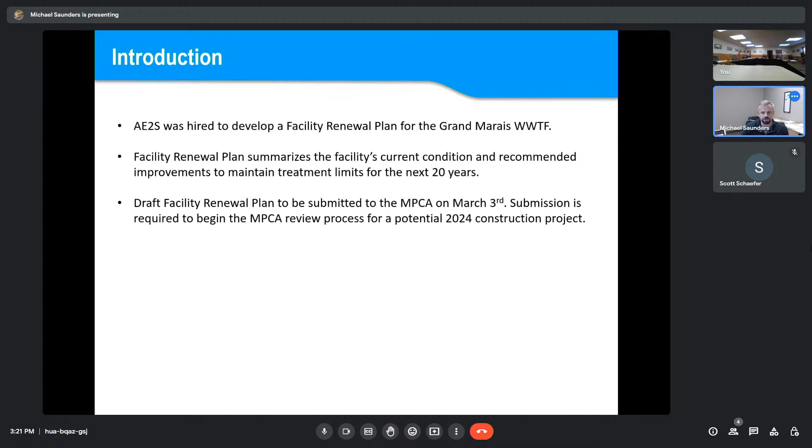So facility description - I figured I should just talk about what you guys currently have now, just a brief history. The facility was originally constructed in 1972. There was a major upgrade completed in 1988. And then disinfection, to remove pathogens, that system was included in the 1999 project.

So raw wastewater comes in, there's a bar screen and a comminutor in parallel. The comminutor grinds up inert solids that wouldn't be able to make it through the plant without being ground up. This is pretty old technology, but I'll get into that later.

It goes into vortex grit removal, removing sand and heavy particles. You really want to settle that out to protect the downstream processes - we don't want that grit going through the pumps or settling out in the oxidation ditch or even the clarifiers. After that, it gets into the more interesting process.

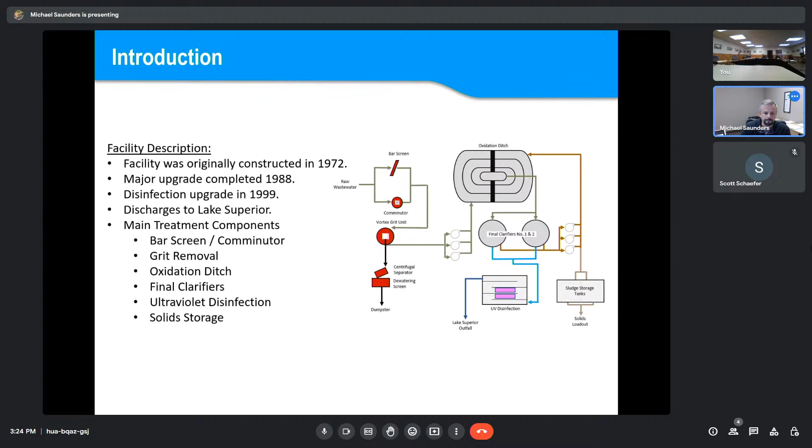Just a couple of comments here. 20-year planning horizon, we included a population growth of 1%. We looked back at past historical census data, and it's pretty stagnant population growth. But for the purposes of planning, best case scenario, we want to consider 1%. So continue adding 1% population, there's going to be more load, more flow with that.

To do that, we utilized the last 5 years of DMR data that the MPCA provided. So this is the current capacity, hydraulic capacity of 2.5 MGD, and then the organic loading is 884 pounds of BOD per day. So that's the current capacity.

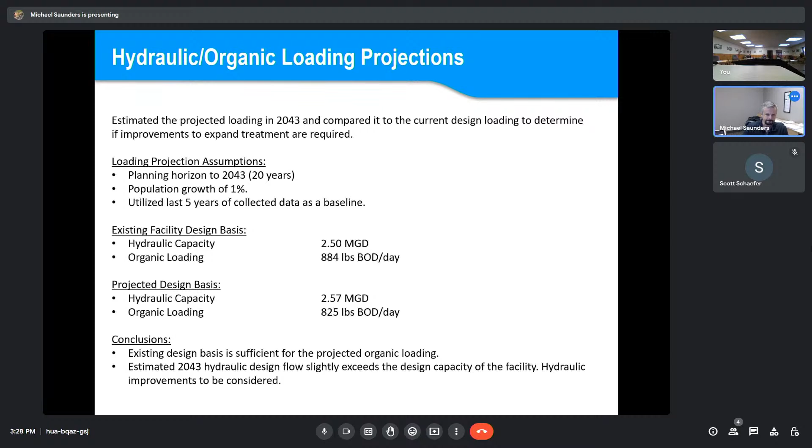So getting into the condition of the facility, I have a few pictures on the next slide here, but just wanted to, there's more detail in the report, just to touch on the highlights. So preliminary treatment condition, that first, the preliminary treatment equipment is located in the service building.

So that comminutor I was just talking about is a fairly antiquated technology. There's much more efficient automated technologies that will save O&M costs through the next 20 years at least. And yeah, inefficient, antiquated, labor intensive I would say, and Neil can probably attest to that there. There's also some corroded piping and valves in that building, likely due to H2S corrosion.

Secondary treatment condition: those aerators that are aerating that oxidation ditch, those over time you can actually lose, they're like the steel paddles that are essentially lifting water and putting it into the air, you're transferring oxygen into the water. So those over time will wear out, they can break off, and also the motors are inefficient. And I think the biggest part of this oxidation ditch is the control system. So right now it's on-off control. There's been a lot of advances in control technology to control the dissolved oxygen in that tank, and you can significantly reduce energy consumption. So that's one big item.

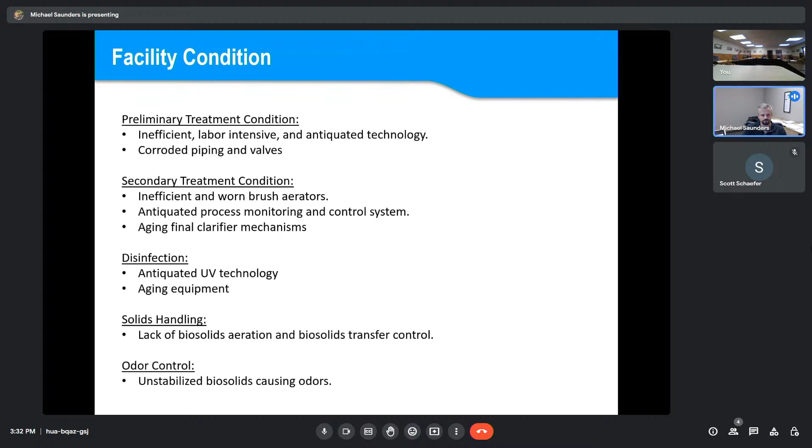Some other items: the structural condition of the facility — if you walk around you'll notice a lot of cracking, and some significant corrosion at the top of the oxidation ditch, likely due to H2S. This really needs to be taken care of pretty soon. You don't want to let this go too long, or it can get to a point where you have to replace the entire tank.

For the purposes of this report, we're assuming you can rehab the current structure, but additional evaluation on site is needed to confirm that. A lot of the concrete structures are showing signs of erosion, so we have some costs in there for replacing or rehabbing those structures.

There's a new membrane roof needed on the service building. It sounds like there's some leaking there, and it's close to the point where you need to replace the membrane beneath the rock on that service building.

Plant monitoring control system — I'd say the current system is fairly outdated, not a lot of control with really anything, like the oxidation ditch or any of your pumps. A lot of modern mechanical plants have PLC and SCADA systems, a central spot where you can control and monitor your entire plant, and I'd say mostly all mechanical plants have that now.

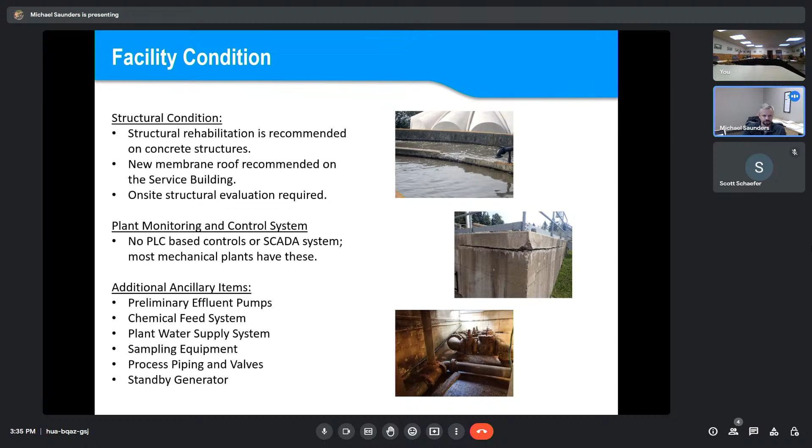So now we're getting into recommended improvements. That was what's wrong with the facility, what we think can be rehabilitated, what should be — now we're getting into how we address these issues.

The preliminary treatment building is probably the largest item on this report. We'd recommend an automatic fine screening and compaction unit. A lot of plants have the current comminutor, which basically grinds up inert material that just flows through the plant. This actually takes out the screenings and material, which will help a lot with maintenance and O&M on your oxidation ditch and downstream pumps.

It's also much more efficient than the comminutor. There are two options listed in the report: one is an in-kind replacement, just replacing the current comminutor and grit removal system; the next is to get this automatic fine screen.

That option involves expanding the service building a bit, so there's some added cost to this alternative, but I'd say it's highly recommended, especially looking at the next 20 years, to make sure you get reliable treatment. There's more detail in the report on that.

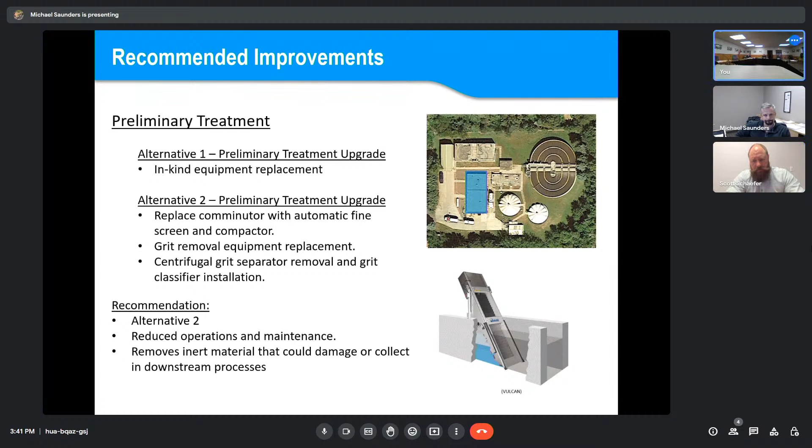So for the oxidation ditch, we would highly recommend putting in new, more efficient aeration equipment with a bit higher capacity to better control the dissolved oxygen in there. That should indirectly help with odor control as well, since insufficient aeration can lead to H2S production, which is the leading cause of odors at a wastewater plant. So new aerators and better process control as well - you can install dissolved oxygen control sensors and actually control the aerator speed to achieve the specific dissolved oxygen you want in the tank. That can lead to a lot of energy savings.

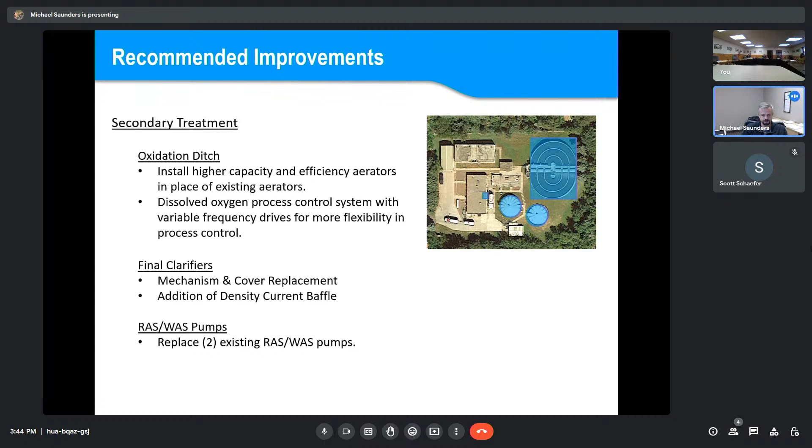And then replacing 2 of the RAS pumps. So there's 3 of them, 2 RAS and 1 WAS pump. I think 1 was recently replaced. We would recommend replacing the other 2 as part of this project as well.

Disinfection, just new UV banks, more efficient UV banks, and then a new control system.

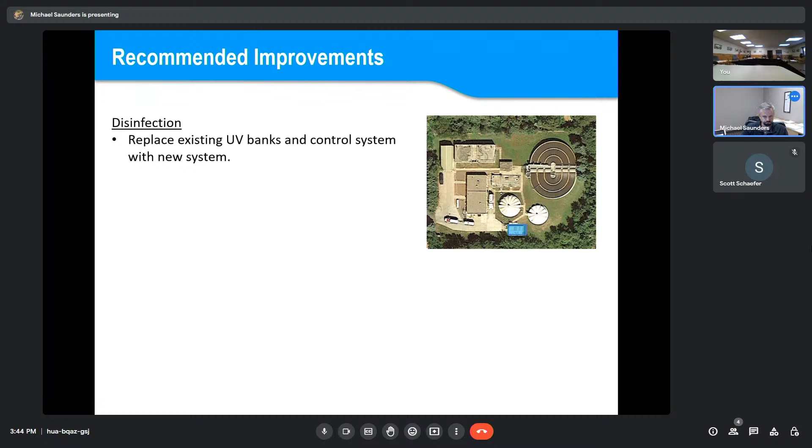And then the solids handling - I would say we're calling it solids handling, but it's really more of improving it. So 3 new aeration blowers. I think that's mainly based on the age of the current blowers that are at the facility. They likely need to be replaced soon.

Valves and piping necessary to independently control the air to each storage tank, so this should help control the odors a bit more to each of those tanks. So Neil can kind of modulate how much air is going to each of them. Right now it's just kind of full bore to each tank.

And then some valves and piping necessary to be able to waste directly from the clarifiers and bypass the tanks altogether and just haul straight WAS. So that just adds flexibility to help with odor control.

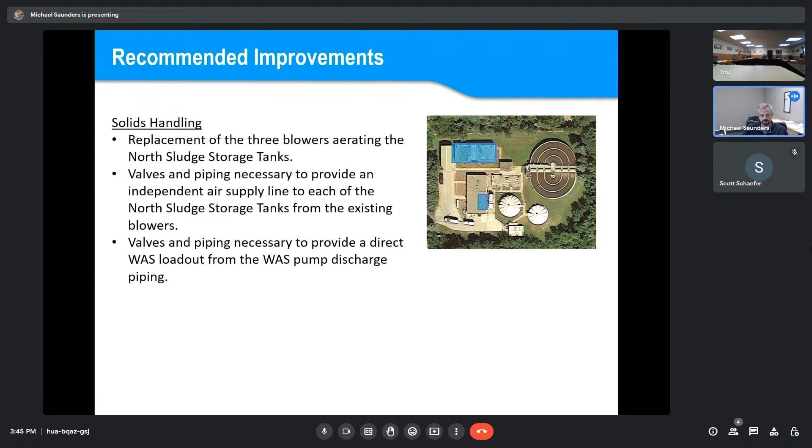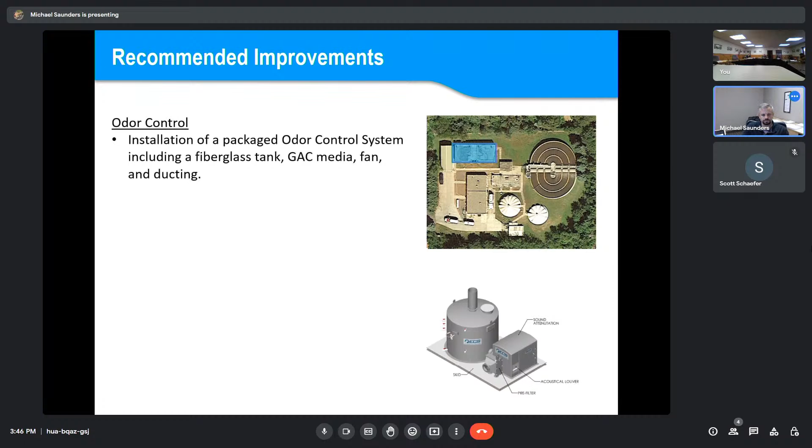And then as far as directly treating the odors, there's gas phase odor control. We had kind of worked on this prior to this report, but it's included in this report as well - pulling the air in the headspace to the biosolids tanks, which we think most of the odor is coming from, and then running it through a granular activated carbon media system to help physically reduce the odor. So I think there's a number of items in this report that will help indirectly reduce odors, but this kind of directly reduces odors, which I think is a high priority from the city's perspective, I would say.

Overall plant monitoring and control systems. A number of these systems we're recommending, the vendors are going to provide control panels. So this option is replacing the remaining control panels with PLC-based control panels - they actually have essentially a computer in the control panel to more efficiently, on a programming logic, control the plant.

And then an overall SCADA system - supervisory control and data acquisition. Never really understood the name of that, but I always understood SCADA. It's essentially a computer station for Neil, where you can even remotely access it, or access it from one location at the site, that pulls in all the monitoring and control from the facility into one computer. Most modern mechanical plants have this at their facility.

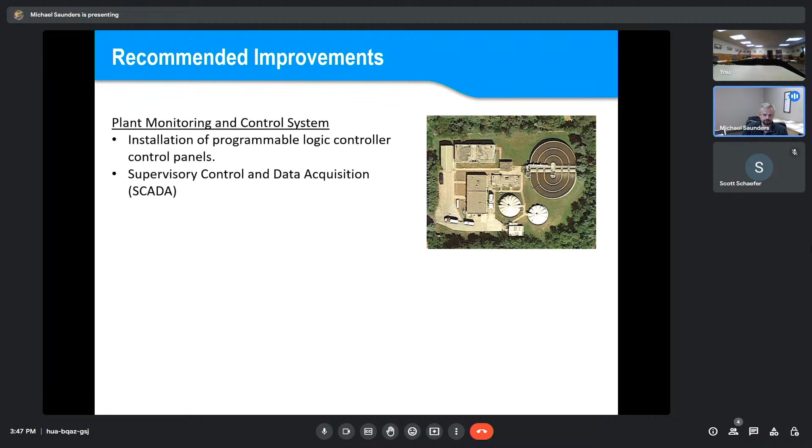The biggest item is definitely the preliminary treatment building, because we're having to basically expand that building a bit, which will take a lot of structural work, and then we'll also need to figure out bypassing during that. So we have some costs kind of in there for now.

So yeah, the oxidation ditch upgrade, clarifier mechanism, cover replacement, new pumps for the WAS and RAS, disinfection, solids handling, odor control system, a number of those ancillary systems we went over, and structural rehab. And there's a few adders on this as well, like mobilization, demobilization, bonds, sales tax on the equipment and material only.

Your overall subtotal is at 5.9, but at this point, in the planning phase, we typically have a 30% contingency, and then any of the engineering, admin, legal - another 20% on top of that. As you go through detailed design on a project, that 30% will reduce and hopefully costs will reduce a little bit, but at the same time you might find more detail in there that the contingency was covering, so normally that kind of offsets itself. Overall, this is the total cost we're looking at for the current improvements on the project.

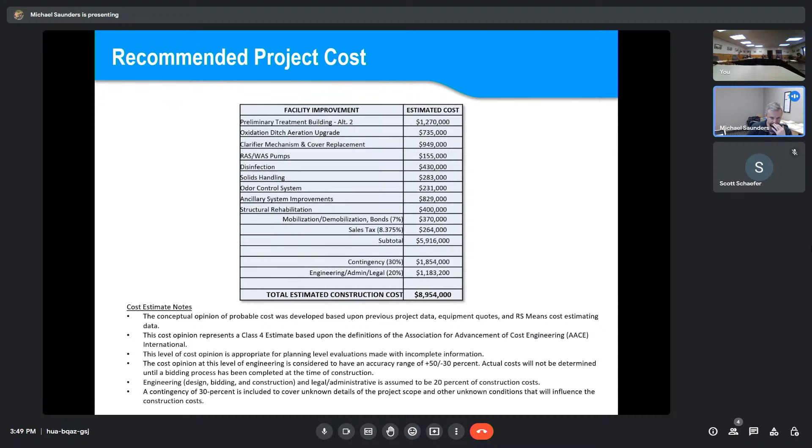So funding considerations. The whole reason we're submitting this report on the 3rd, in 2 days, is to get in line in the MPCA's queue for a potential project in 2024. It's not to say that has to happen, but it's good to get in line for it.